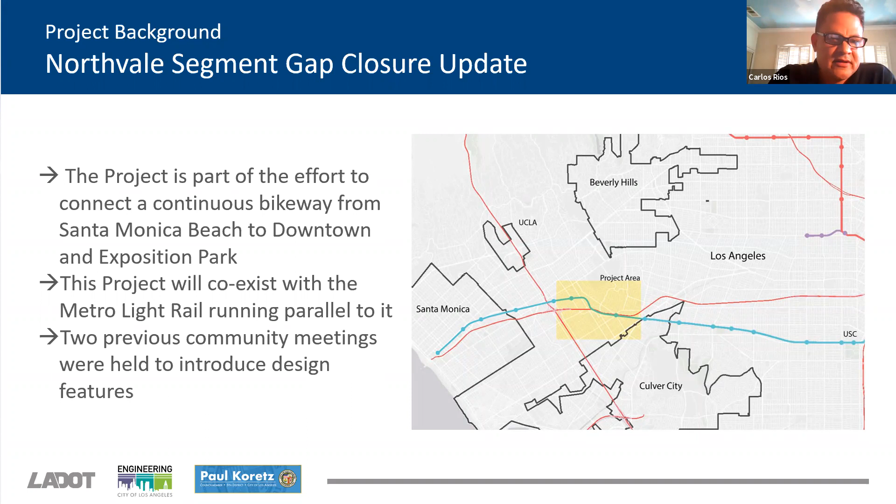So the overall objective of the project, I repeat, is to create an active transportation facility that once completed will offer a pathway from Expo Park all the way to the west side into Santa Monica.

This gives you a general description of what we're building. The segment in yellow is what we're here to discuss today, that last vital gap closure we've been talking about. The segment in green to the left and red and green to the right are our existing facilities.

The yellow portion in the middle can be broken up into two phases. One is at grade, at street level, shown as the heavy dash line, and the dash line to the right is the Class 1 bicycle path that will be constructed as part of this project to create an overall bicycle facility for all users.

With that, I'd like to hand the mic over now to my colleague, Michael Haddadin, to go over some more specific details on the project.

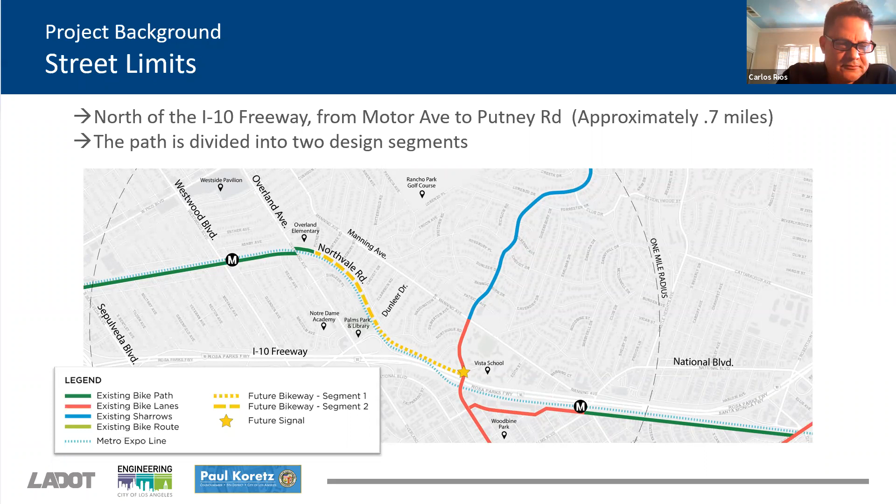Good evening everyone, and thank you for coming to the webinar. As my colleague said, we had two community meetings previously and got feedback from the community, from the Cheviot Hills communities, which is your community, and your participation.

We took all the requests from the community and the bike users and added them into the design, so we upgraded the facility from the last time we explained how we're designing it.

As we said earlier, the two segments: segment number 1 is from Motor Avenue all the way to 400 feet east of Dunleer Drive. That's segment 1. It is off the street and will be designed as a Class 1 bike facility.

The design segment stretch is almost 0.35 miles, and it is upgraded to a Class 1 bike facility. That means it's off the street and classified as multi-use.

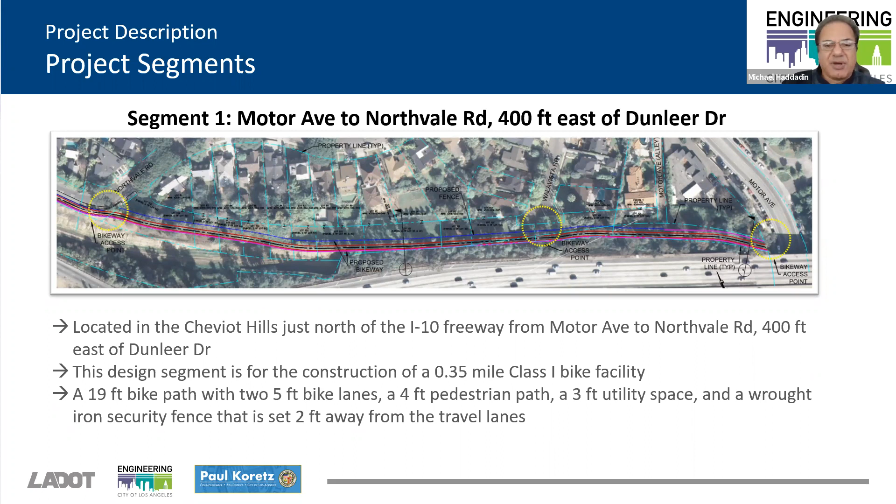Segment number 2 is where the bike facility will climb up to street level and be constructed there, starting 400 feet east of Dunleer Drive, from Northvale Street, going west another 0.35 miles, reaching Putney Road.

The existing Metro facility from Putney Road to Overland already has a bike facility, and we're going to connect to it.

This facility on the street will only be a bike path, again Class 1. Previously it was at the same level as the street and was Class 2. Now we upgraded the design to a Class 1 bike facility, which is a separation from vehicular traffic at the street level.

The separation will serve a safety purpose and will be protected for bikers. Each lane is a 4-foot lane, so the total bike path separation from Northvale Road will be an 8-foot bike path, protected by a 3-foot buffer with curb and gutter at a different elevation. As added safety, we're going to put a cable railing fence constructed between bollards, either concrete or wood, that we haven't decided yet. The cable railing will separate the bike facility from vehicular traffic.

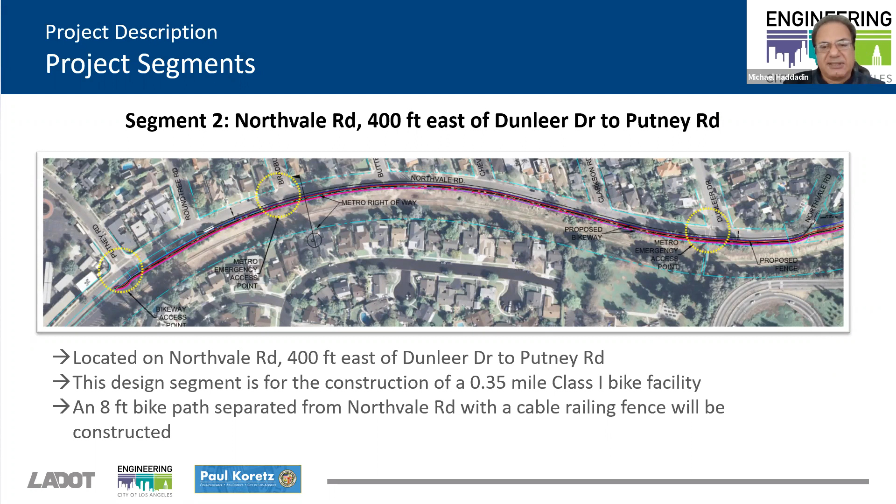Next slide, please. This is a rendering showing the facility from Motor Avenue all the way to 400 feet east of Dunleer, which is segment 1.

As the rendering shows on the right, you'll see the wrought iron fence at the north of the facility, and then the utility facility where we'll put bike lights for enhanced illumination. You can see the pole erected within the 3-foot easement space, and then the pedestrian path will be 4 feet.

After that, there will be a bike path going east and a bike path going west, each 5 feet. Then there's a buffer between the bikers and the bulkhead wall, at least 2 feet, which is standard. That way bikers will feel safe on the bike facility with a buffer from the first obstacle, the bulkhead wall at the south of the facility.

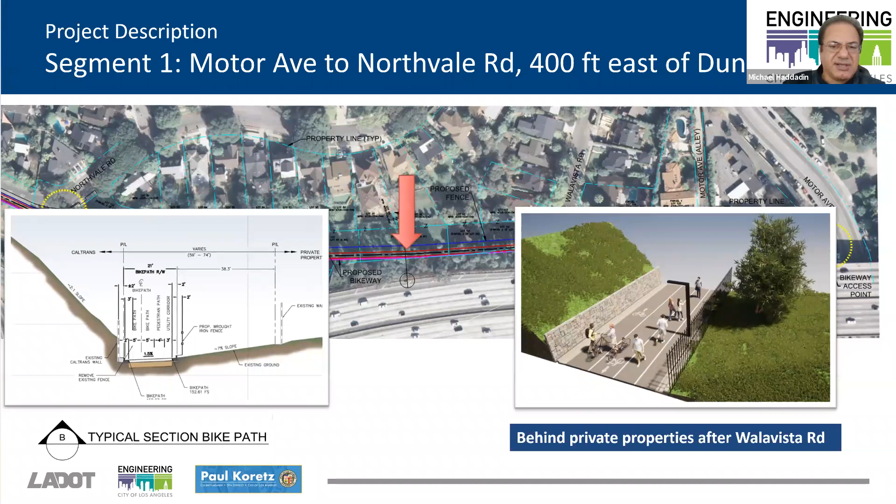Looking at the cross sections, let's go back please. Let us look at the typical cross sections here. If you can zoom in on the typical cross section, Sam, please. Yeah, this is in general what a typical cross section looks like that will be bordering the homeowners' properties.

Going from left to right, the left is the south portion of the facility. As you see, this is the retaining wall. In some portions, Caltrans already has an existing retaining wall, and in some portions we will build a bulkhead wall next to Caltrans' wall, spanning from Motor Avenue at the bridge side all the way to Caltrans' existing retaining wall. There will be a buffer between the first obstacle, the retaining wall, and the facility of 2 feet minimum standard.

Then the curb and gutter is 2 feet, each bike lane is 5 feet and 5 feet, the pedestrian path is 4 feet, and the utility corridor is 3 feet. To contain the facility, there's a concrete curb and gutter for drainage purposes, and then we'll erect the wrought iron fence 2 feet away from the curb and gutter.

Based on feedback from the community, we pushed the bike facility all the way toward the hillside to give them privacy and enough buffer. The property line we're negotiating right now sits all the way to the east, almost 38 feet away from the property owners' existing walls. That's it for this slide.

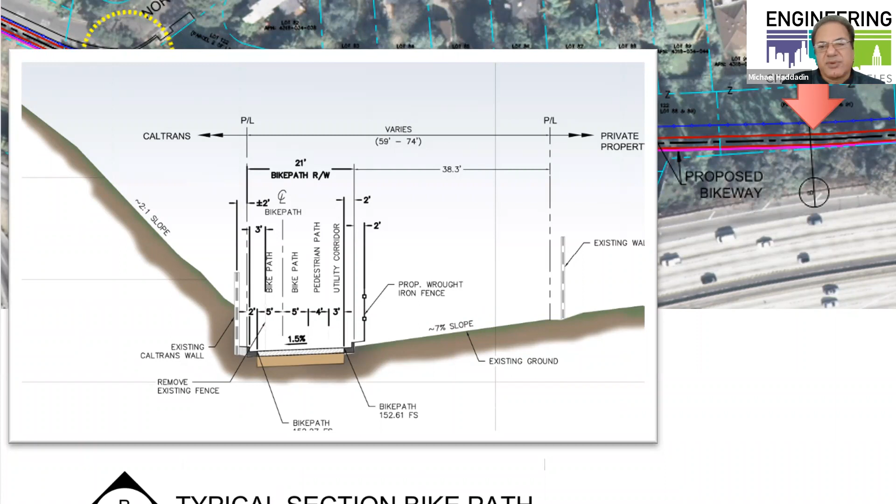Next one, please. Yeah, this is the wrought iron fence. Getting feedback from the community, they like this rendering for the wrought iron fence, which will be 10 feet high with arrowhead spears pointing toward the bike path. Most people liked this wrought iron fence design that we'll be negotiating.

This rendering shows exactly how the facility will look. On the left side here, you can see the pedestrian path, the bikers, the retaining wall, the hillside, and the wrought iron fence. The wrought iron fence will start from Motor Avenue, from Motor Alley, all the way to the Northvale street level, which is 400 feet shy of Dunleer Drive.

So all the homeowners will have the same wrought iron fence, 10 feet high, serving as a security fence on the north side of the facility, beside the buffer between their retaining walls or garden walls or whatever they have on that side.

It will be a big buffer between their property and the wrought iron fence we are building next to the facility. We push the bike facility for the community as much as we can toward the slope, in a way that we can contain the facility before we get to the slope, and avoid any excavation that will exceed a 2-to-1 slope. The retaining wall will help us push it all the way to the slope.

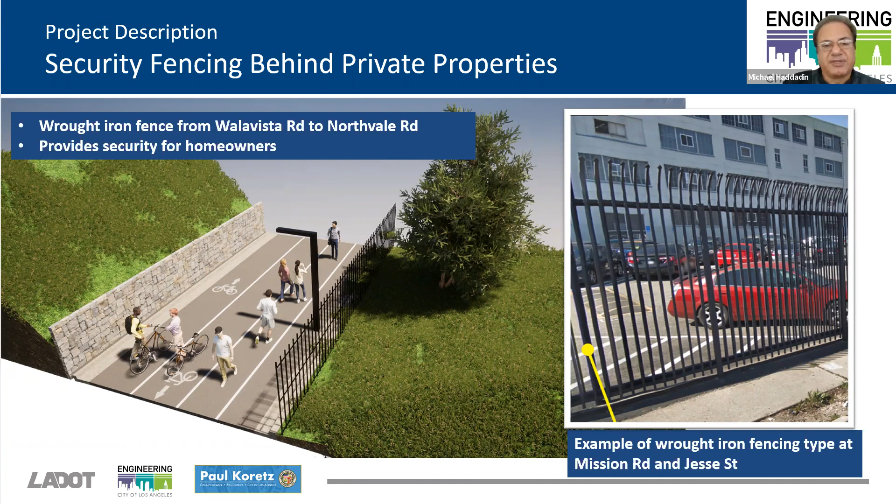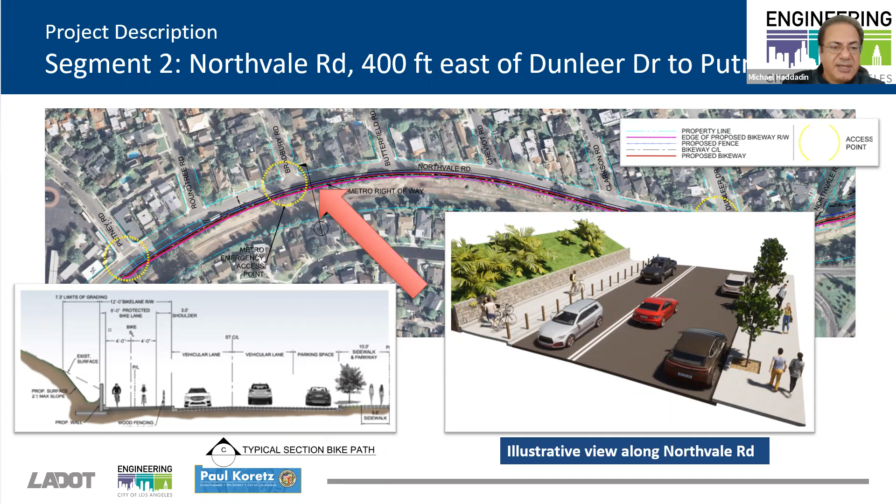That's it. Can we go to the next one?

Yeah, this is the access point. In the previous 2 community meetings, we asked the community where they want to join the bike facility, at what point they need to access it, and after getting feedback from them, we decided there will be 3 access points at segment number 1. The first one will be at Motor Avenue - that's the first one where we can join. The second one will be at Walavista Road. And the third one will be at the street level at Northvale Road. That's segment number 1.

And this is next to the 10 freeway. Yeah, can you go to the next slide please, Sam?

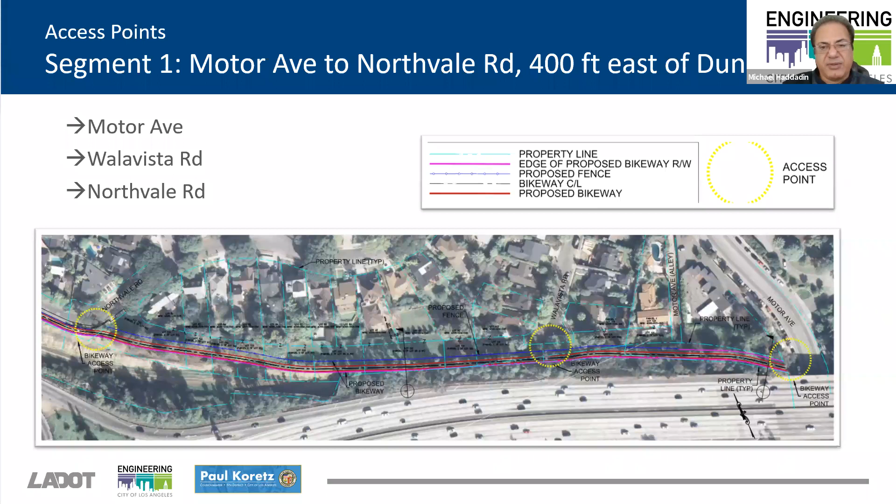Segment number 2, again, is going to have 3 access points. The first one is going to be at the pedestrian bridge - it's going to be an access road at Dunleer Drive. We're going to provide a handicap access ramp on the east side and on the south side, I'm sorry, and the north side of the street. Then access to the pedestrian bridge will be maintained at Dunleer Drive. The second one will be at Bradbury Road. And the third one will be at Putney Road, which is the end of the bike facility. So you will have 3 access points at segment number 1 and 3 access points at segment number 2.

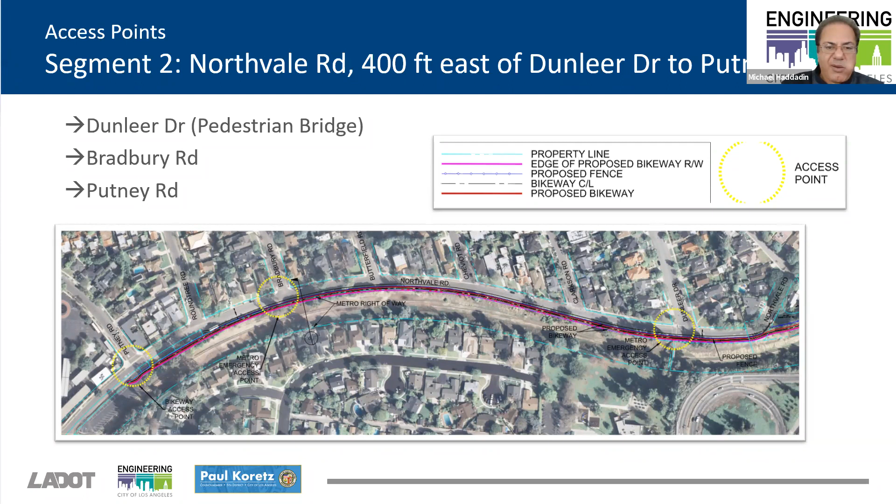That mainly concludes my presentation - it's just in general here. This is the crossing on Motor Avenue. You want to cover it, Sam, or you want me to cover it? Yes, I can. Go ahead, thank you, Sam. All right, thank you very much, Michael.

The Motor Avenue crossing is one limit of this project and is a very important access point for both pedestrians and bicyclists who wish to access the bike path. This access point connects the bike path with our on-street bike lane network on Motor Avenue. To accommodate the users of the bike path safely, we are planning to install a traffic signal and crosswalk at the intersection of the Julia Ann Singer Therapeutic School and Motor Avenue. The traffic signal will be placed north of the I-10 overpass to protect bicyclists and pedestrians from northbound traffic, as well as vehicles turning left from the Ann Singer Therapeutic School driveway, also known as the Vista Del Mar driveway. Curb extensions are also planned at the crosswalk to reduce the time it takes to cross the street and to improve visibility for those who want to cross.

In the last community update meeting, a parking analysis was conducted and it determined there would be limited impact on the parking at Motor Avenue. This concludes the slide for our Motor Avenue access point. I would now like to introduce BOE, Department of Public Works, Chief Real Estate Officer 2, Uriel Jimenez, to give an update on the real estate work along the bike path.

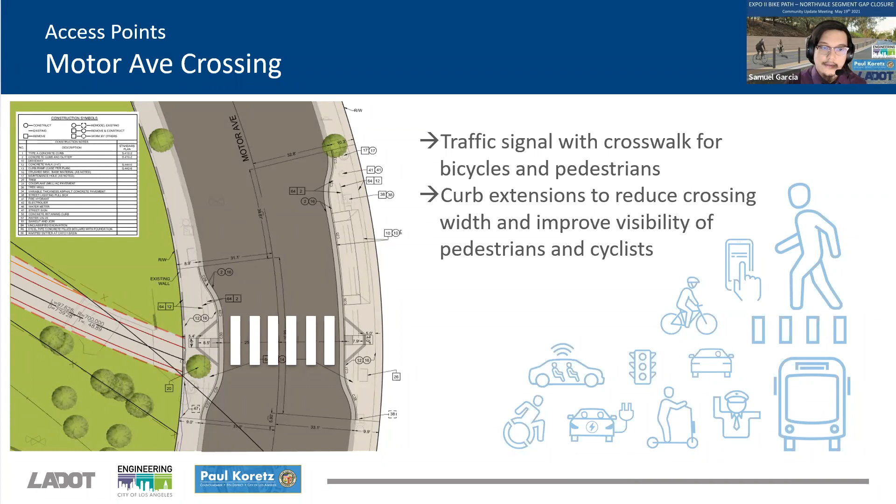We were tasked, my team and I were tasked with acquiring a portion of 13 private properties. We added an already acquired city-owned property to the project, and we're negotiating with Metro and Caltrans to acquire additional property that is needed for the project.

One thing I'd like to point to particularly: the bike path is being designed to create the greatest public benefit while causing the least private harm, in such a way that it's being constructed as far away as possible from the houses to the north. There's a lot of moving parts.

There's challenging topography at both ends of the project. The middle section is relatively level, and we're able to move it further south. Whenever possible, we moved it as far south as possible. We anticipate having all the property to meet the schedule, which will be discussed shortly.

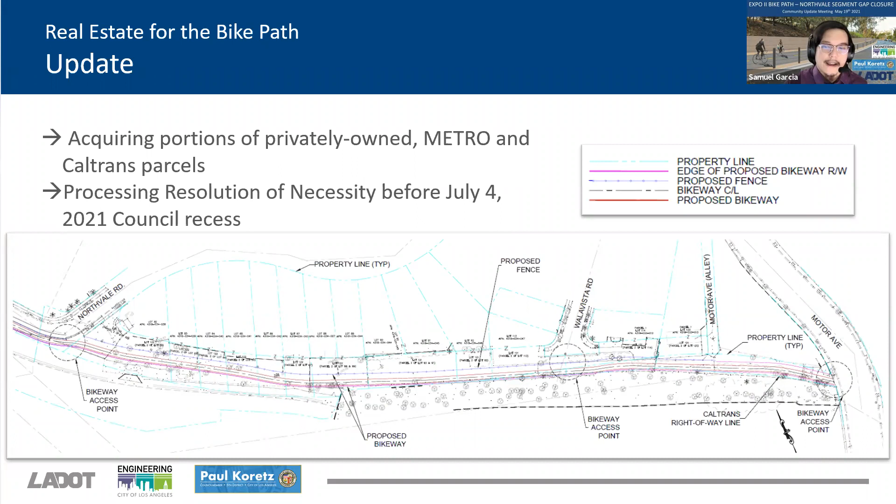Michael, you're muted. I'm sorry. Yeah, yeah, yeah. Hello, everyone. Again, the delivery of this project.

This is the timeline that most of you will ask: how come it takes so long to design and construct the facility? It's just the merit of public work projects. It takes time to fund the projects, and it takes time to negotiate in good faith.

As our chief real estate mentioned, we need to negotiate with the homeowners in good faith to get the right of way for the projects. So we are expecting that the design will be substantially completed in September.

So both of them, the right of ways and the end of the design phase, will coincide by the end of this calendar year.